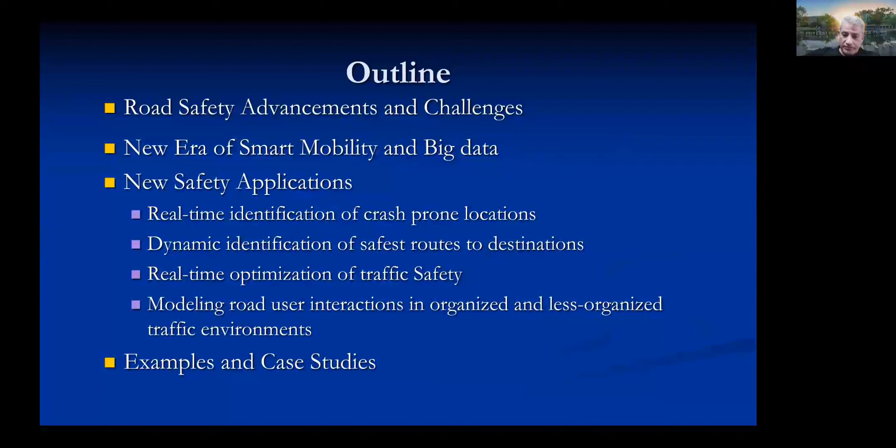So I'm sure you all know, and you don't want me to repeat that, it is very important to reduce the social and economic cost of collisions. The importance of reducing these costs cannot be overstated. We have 1.35 million people killed every year, and we are the only profession, transportation engineers, that have a product, and this product is the road network, that is associated with 1.35 million fatalities and 50 million injuries. And we have been getting away with it for the last 50, 60 years by blaming the road user.

There is some good news, especially in developed countries. Between 1970 and 2005, there has been significant reduction in road fatality rates, despite a considerable increase in traffic volume and vehicle use. So this is really good for developed countries. Although the picture has reversed and we don't have this reduction anymore.

However, associated with these advances are a group of challenges that will complicate the future direction of road safety if we don't change our approach to managing road safety. These challenges will make it difficult to achieve further advancements in reducing traffic fatalities and injuries. And in my opinion, these challenges are the reason for the smaller reduction and in many cases increase in road fatality rates in recent years.

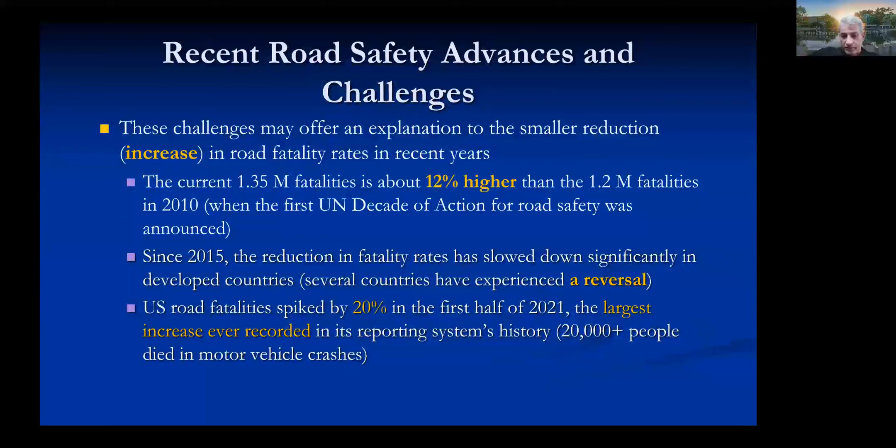So what are these challenges? Some of these you may know already. Reliance on collision data is reactive and has fundamental ethical and practical issues. A significant number of collisions need to be observed, which we will subsequently strive to prevent. So basically, stated bluntly, we need to have fatalities and injuries first to justify funding safety improvements to reduce future injuries and fatalities. So to spend money on improving safety, we need to identify locations as black spots, which means that these locations should have fatalities and injuries, which doesn't make a lot of sense.

The second one is the difficulty of evaluating the effectiveness of newly installed safety treatments within a reasonable time period. We're using 3-5 years of collision data. And because we cannot tell quickly how effective a new safety treatment is, practitioners are being discouraged from experimenting with innovative but untested safety treatments. We don't try new things because we will not know how safe or how effective they are. So there is a need to evaluate safety over shorter time periods, not 3 years, not 5 years, not even a month. We need to go for a much shorter time period.

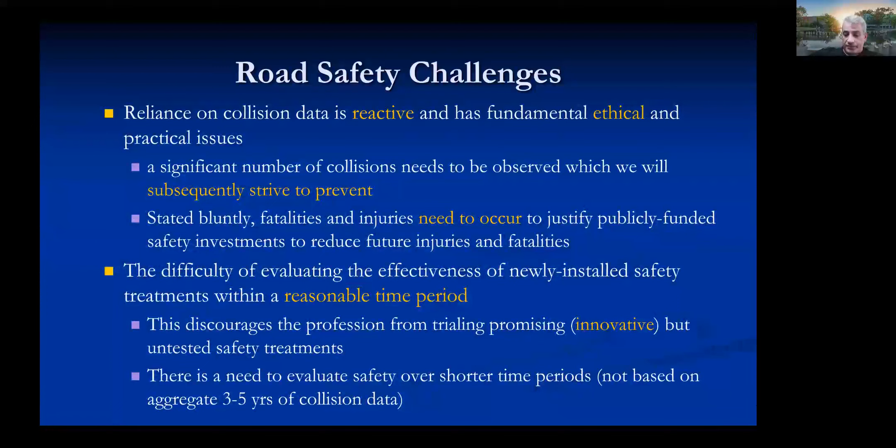So what is the good news, if there is any? Yes, there is, in my opinion, very good news. The good news is that we are on the cusp of a new era of smart mobility. And by smart mobility, we're talking about the application of information and communication technologies, which will lead to interconnected road infrastructure, travelers, and transportation modes, leading to higher safety, enhanced mobility, and minimum impact on the environment.

New technologies such as connected and autonomous vehicles are expected to provide considerable social and economic benefits. However, in my opinion, the biggest benefit will happen from big data. The expanding use of information and communication technology in transportation will allow the collection of huge, unprecedented volumes of data across all transport modes and systems.

So according to a new study from Morgan Stanley, for example, autonomous vehicles are expected to generate as much as 40 terabytes of data an hour from cameras, radar, and other sensors. And these can completely change the way we evaluate and manage safety, something we could not do in the past.

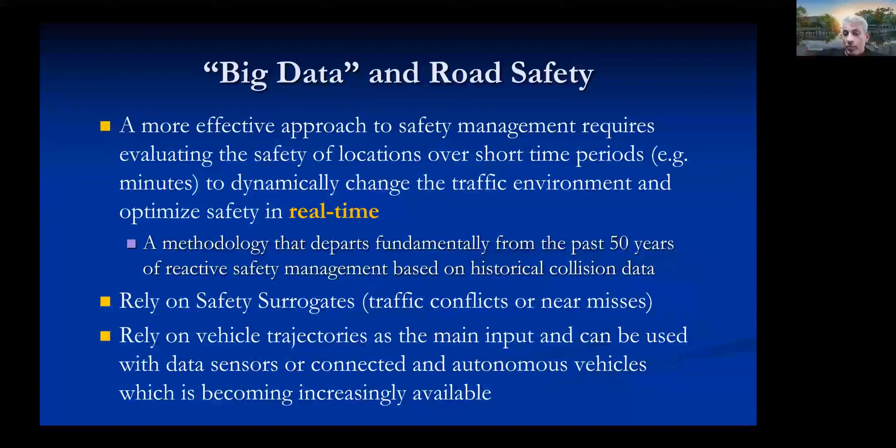And the main input to the new evaluation methodology will rely on road user trajectory. And it can be used with data sensors or connected and autonomous vehicles. It can come from cameras, from LiDAR, infrastructure-based LiDARs and cameras, or from the autonomous and connected vehicles as they move, which is becoming available. Much of the data is currently available and we can use it now, but we don't have the techniques that will allow us to mine and understand the data.

Another huge benefit, and this is my opinion again, is that this real-time safety evaluation will allow us to resolve the conflict between mobility and safety. Historically, road transportation has mainly involved the consideration of two main values, mobility and safety. In the past, these two values were always in conflict. To improve safety, you need to restrict mobility. Why? Because the higher the mobility, the higher the exposure to collision risk.

So most of the safety countermeasures were always targeting reduced exposure, no left turns, no right turns on red, and so on. In my opinion, again, the use of advanced technology and the availability of big data and the use of surrogate safety measures, not collisions, for real-time optimization of transportation networks can resolve this decades-old conflict between mobility and safety.

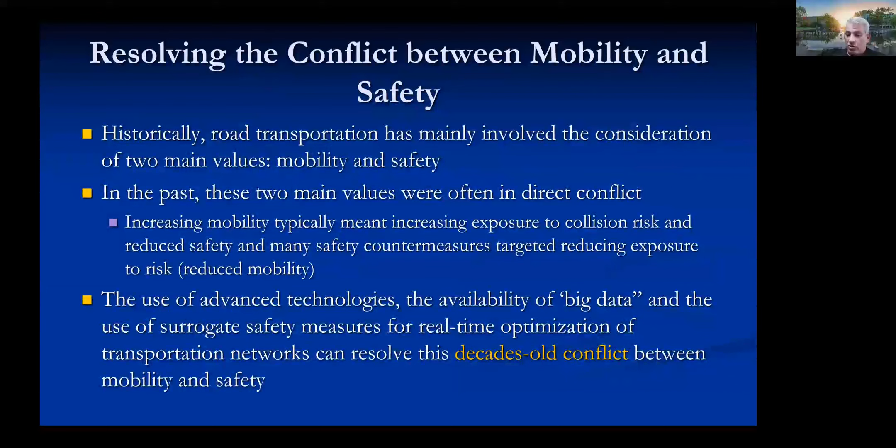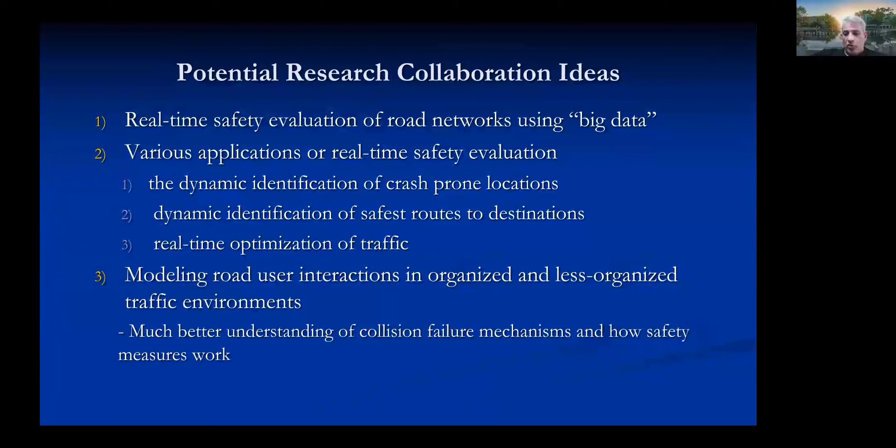So I'm going to share with you three main applications where I feel that this big data and this new era of smart mobility can make a big difference for safety. The first one is the real-time safety evaluation of road networks using big data. I'm going to show you different applications of real-time safety evaluation, the dynamic identification of crash-prone locations, dynamic identification of safest routes to destinations, real-time optimization of traffic, and how we are now modeling road user interactions in both organized and less organized traffic environments, which is giving us much better understanding of collision failure mechanisms and how safety measures actually work. So let's start with the first application, real-time safety evaluation.

What do we mean by real-time safety evaluation? Real-time safety evaluation will estimate the real-time crash risk from dynamic traffic data that are updated within a very short time interval. This was not possible 10 years ago. Now it is available because of recent advances in sensor technologies, such as edge cameras, LiDAR, and connected and autonomous vehicles. And these are resulting in large amounts of real-time traffic data, which we can use for real-time safety evaluation.

Real-time safety evaluation has been there for a long time, and researchers have done that for over 20 years. But in my opinion, most of the existing real-time safety models rely on historical collision data. So we're doing regression analysis again. We take collisions, and we have a binary logistic model, crash or no crash. So these rely on collision data again, which is problematic, as I said from the beginning.

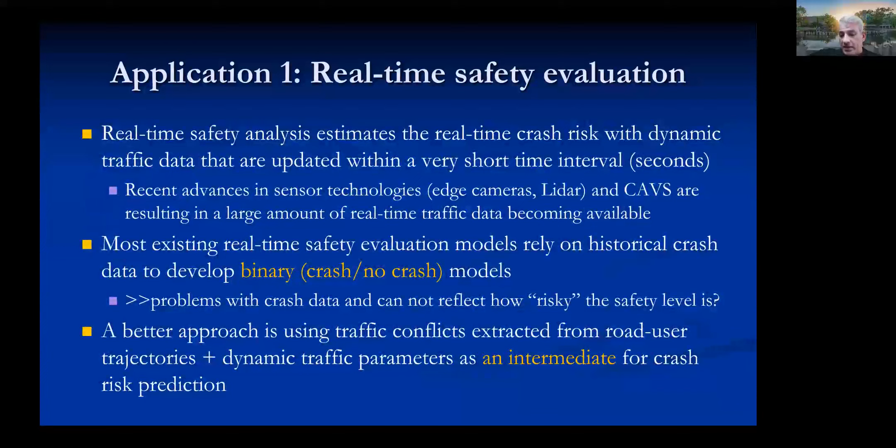Not only that, these existing models, and there is a lot of work in Florida and actually in China, many researchers are using these crash-based real-time safety evaluation models, and they don't reflect how risky the safety level is. A better approach, in my opinion, is using traffic conflicts extracted from real-time road user trajectories, plus dynamic traffic parameters, as an intermediate for crash risk prediction. Let me show you an example of some of the work we've done with autonomous vehicle data from Lyft.

So this is a case study from a corridor in Palo Alto, California, using 3 months of autonomous vehicle data. The corridor had 9 signalized intersections, as you can see, and there is an autonomous vehicle going through the corridor back and forth.

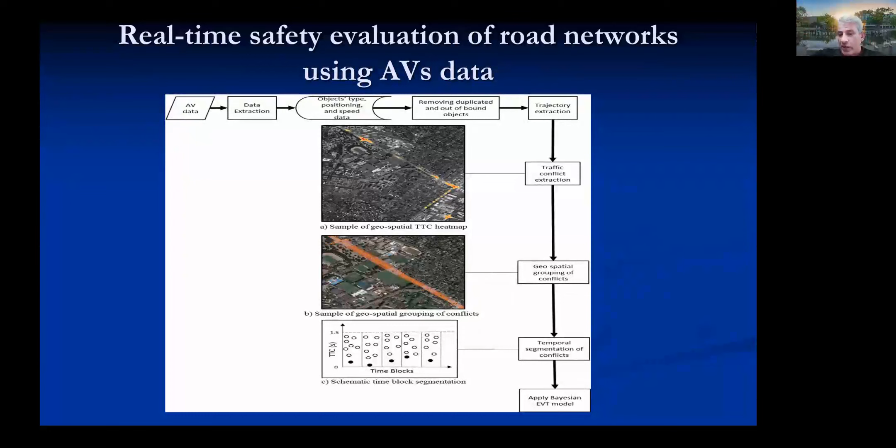So we take this data generated by the autonomous vehicle and extract all the vehicle trajectories, not only for the autonomous vehicles, but the surrounding vehicles as well. And from these trajectories, we extract traffic conflicts. We do geospatial grouping of conflicts, and we can also do temporal segmentation of conflicts, and then we can model that to get the real-time crash risk. So that's the corridor, and you can see the conflicts changing in real time.

And then what we can do is take these conflicts, and there are several techniques that we can use, all based on extreme value theory. I really like this approach, because it offers a realistic way of going from trajectories and conflicts to crash risk without using regression and modeling a crash, no crash, based on historical information.

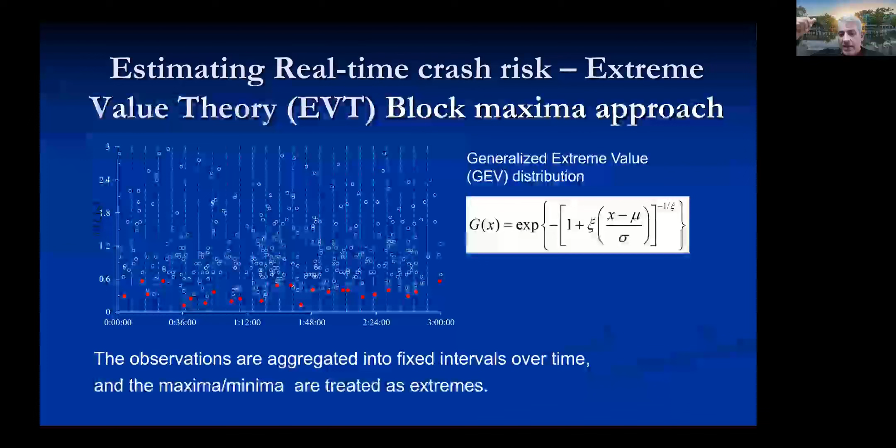So in this case, you see that these are all the conflicts, and we're using one conflict indicator in this case, which is the time to collision. We take the extremes, and this approach is called the block maxima approach. So these red dots are the maxima or the extreme conflicts within each time interval. We fit an EVT model in this case, and we can use that to extract crash risk from conflicts.

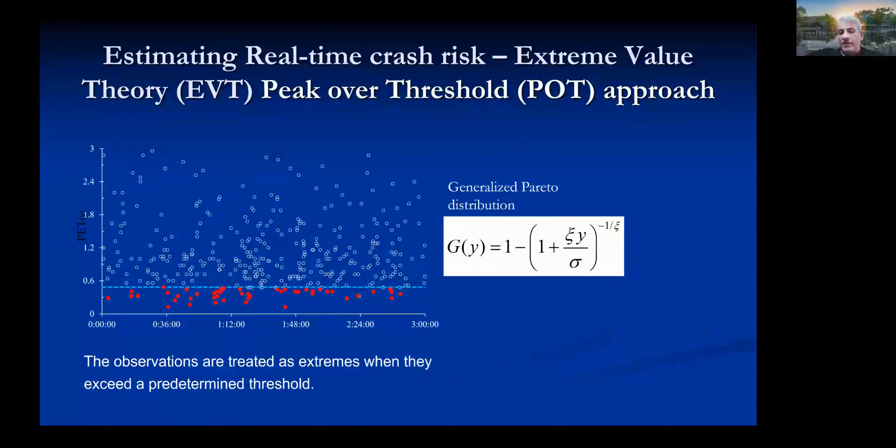Another approach is what we call the peak over threshold approach. And again, this threshold can vary, and it can be a function of many covariates. And in this case, we will have a generalized Pareto distribution. And again, we can use that for real-time safety evaluation of corridors and locations.

So in this case, we have 4 locations in Surrey, British Columbia. And for each location, 4 figures, 1 location each, you see different conflict indicators: MTTC, modified time to collision, PET, post-encroachment time, DRAC, deceleration rate to avoid a crash, and so on. And for each one, the green horizontal line is the observed number of collisions, and the red dot is what we are estimating from this aggregate crash rate over a year. And you can see that the model works extremely well. So we can go from vehicle trajectories and conflicts to actual crash risk.

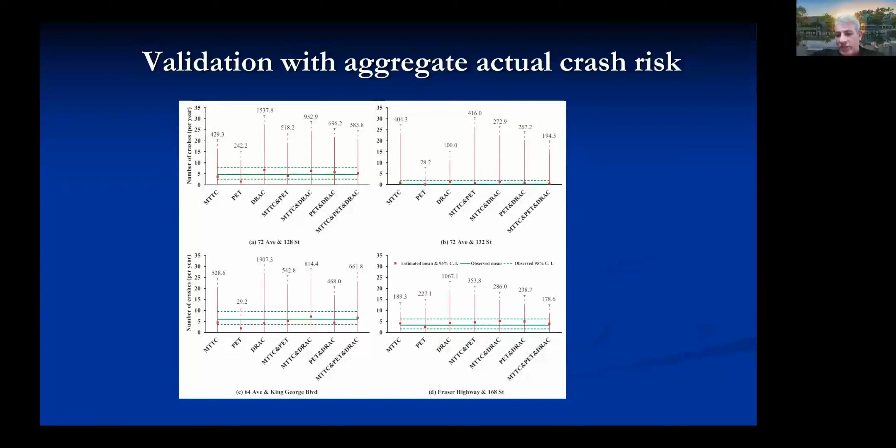But the beauty, what I really like about this approach, is that we can do real-time safety evaluation. So in this case, we defined 2 real-time indicators from the EVT distribution. One is called crash risk, which is only positive when there is a risk of a crash. The other one, which in my opinion is more useful, is the return level, which fluctuates. So it offers a value that can reflect how risky a situation is.

So in this case, you can see we're using different indicators, the time to collision, the post-encroachment time, DRAC, and for each indicator, there are 2 real-time metrics. One is the crash risk, one is the return level. And you can see that for these 4 intersections, it varies in time, and we can use that to evaluate the real-time safety of a location.

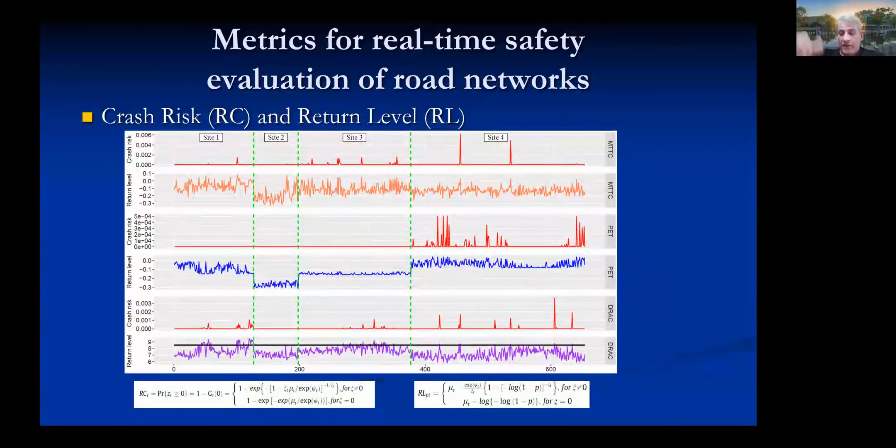So this is going back to the corridor in California. You can see that we can evaluate the safety of the corridor, intersections, and segments. And you can see how we can change these in time, and we get very good evaluation of the safety level.

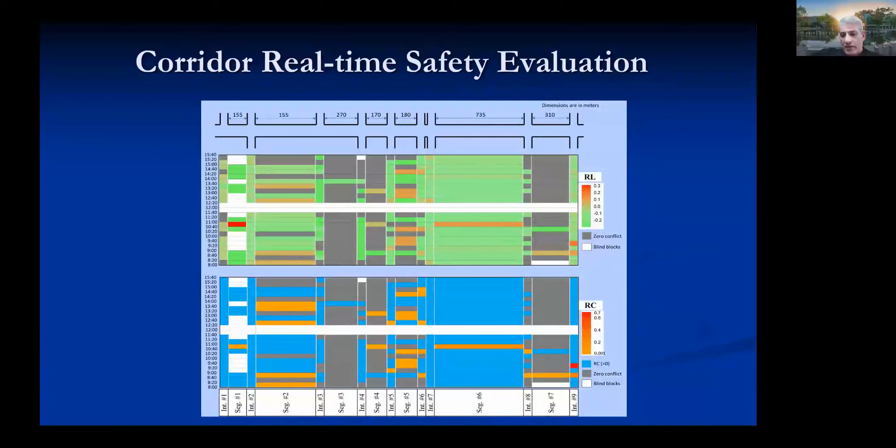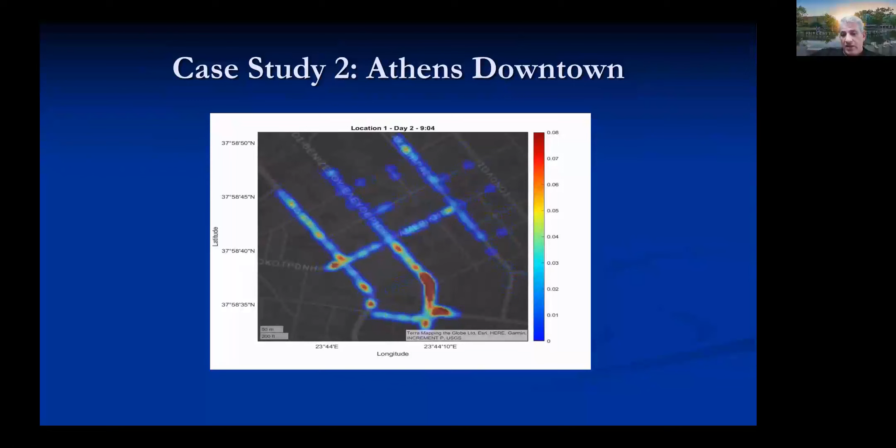So what is collision prone at time 1 is different than what's collision prone at time 2, time 3, and time 4. And we can change that by making changes to traffic control, mainly, to minimize the adverse safety impact of traffic operation.

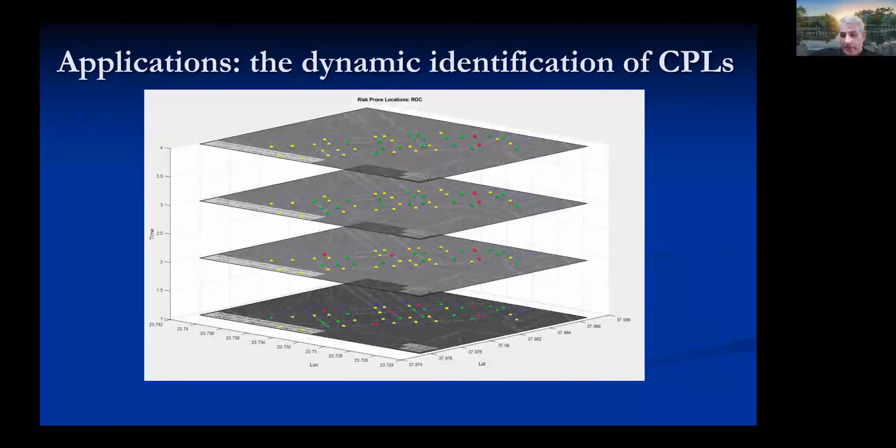And I can also aggregate this information. I don't have to only apply traffic control safety improvements. I can aggregate this information and end up adding a left turn lane or adding a right turn lane. So I can still go for the high-level countermeasures in addition to making dynamic traffic control changes.

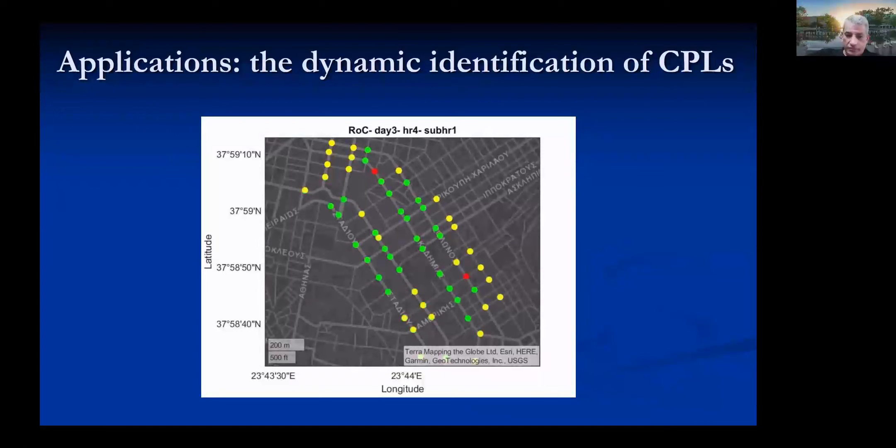So how would you improve the safety of these dynamic crash-prone locations? In general, safety improvements at the identified crash-prone locations can be undertaken by making changes to traffic control, phase changes, variable speed limits, ramp metering, etc. Or it can also be done at the network level. In this case, it will be signal offsets, rerouting, which in my opinion carries a lot of potential.

And this real-time safety optimization can lead to significant safety benefits that cannot be achieved through the traditional current reactive safety management approach. Let me give you an example of some of the work we've done on taking signalized intersections and optimizing the operation of the signal for safety.

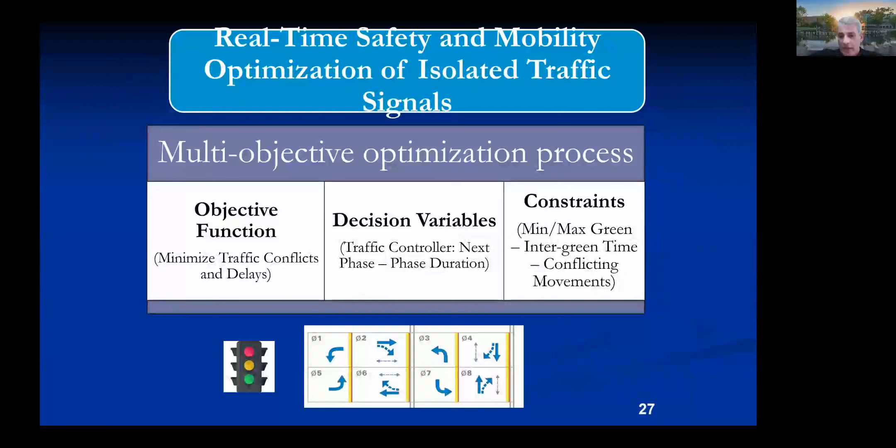So these adaptive traffic signal controllers have existed for a long time to minimize vehicle delay. But very few efforts, if any, were undertaken to optimize safety in real time. And if you remember, for the first time, we have something like this.

So if you look at the bottom figure, the joint return level, we have a safety level that fluctuates in time. And I can use that in the optimization process to minimize this safety level, this crash risk. And by doing so, I will minimize the number of crashes that will occur at the signal.

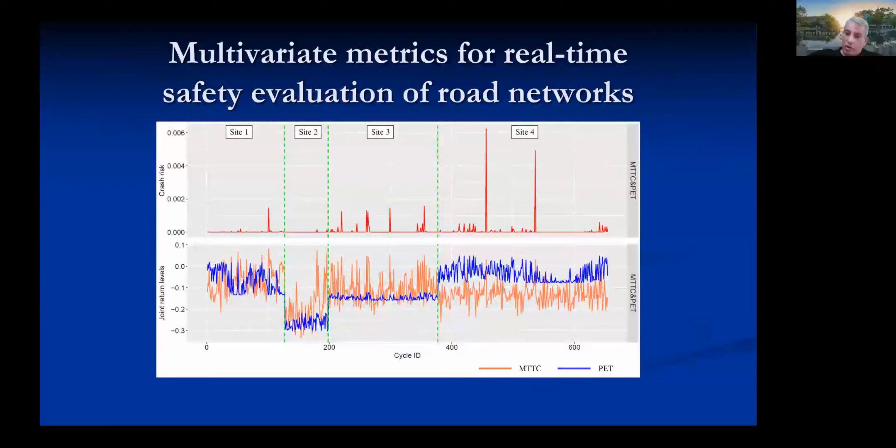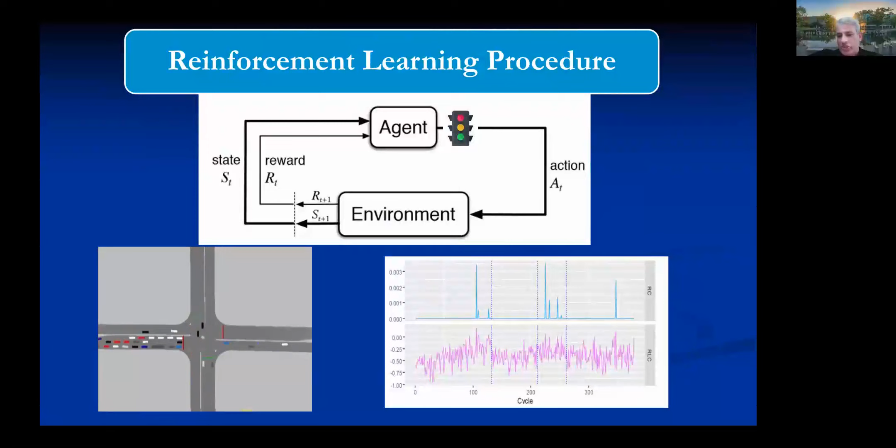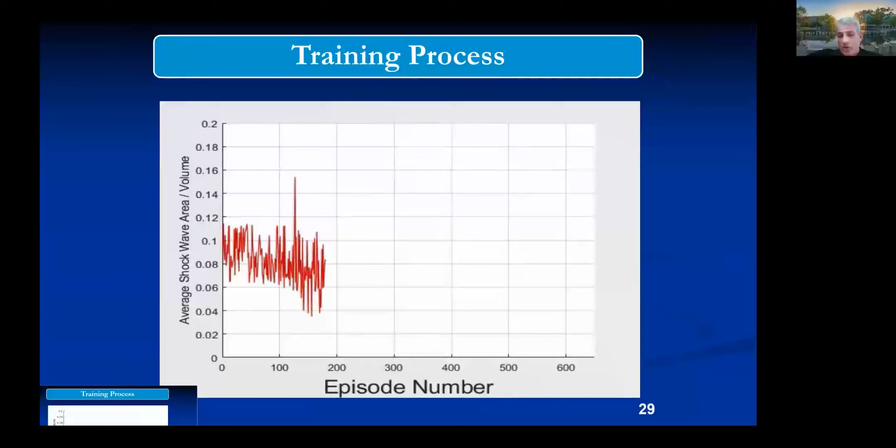So again, you can see that we use both, but I prefer to use the RLC, which is the return level on a cycle, because it is a continuously changing safety level that I can use for minimizing crash risk and conflicts. And I can train the controller using AI techniques. In this case, we are using a technique called reinforcement learning.

And you can see in this case how the shockwave area at the approach to the intersection is changing as the algorithm is learning how to minimize safety risk. So I think at episode 530 or something, you can see that the controller has already learned how to minimize crash risk and how to minimize average shockwave area.

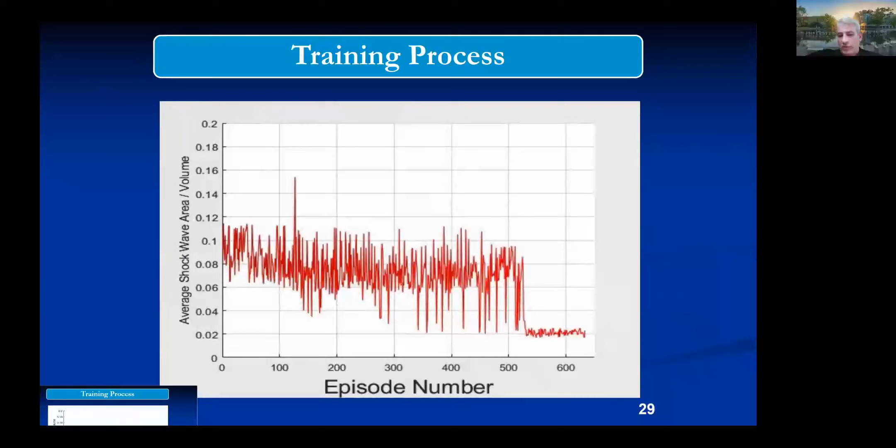Was that a question?

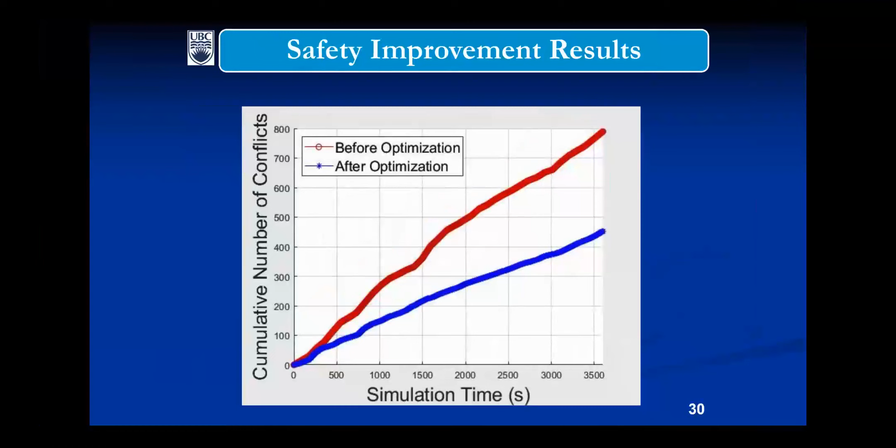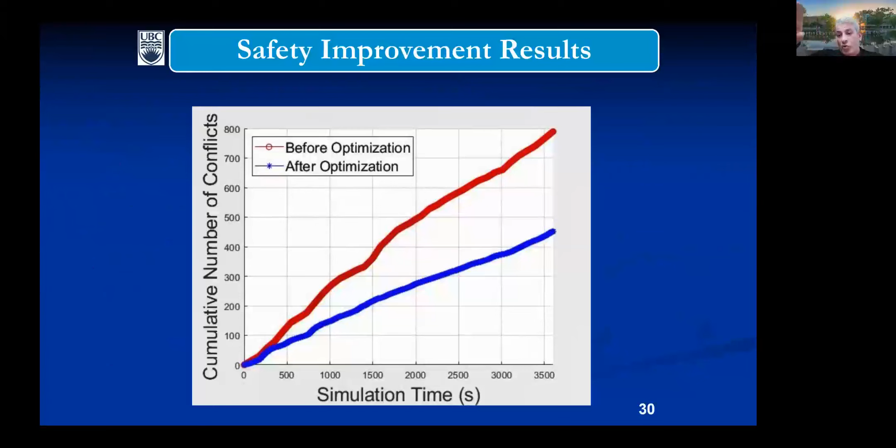Another work that we're doing that I really think would be very important is what we call the signal vehicle coupled control. In the one that I just showed you, we are optimizing the traffic controller operation. But we can also adjust vehicle speeds and vehicle trajectories to minimize crash risk. So I can have a coupled control.

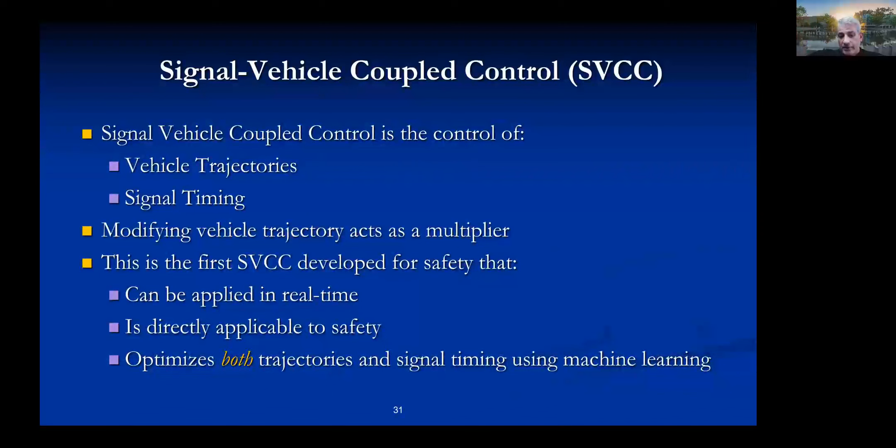So in this case, we use what we call soft actor-critic RL algorithm, reinforcement learning algorithm. The inputs are estimated conflicts on each approach using a model, and also the time and phase and the vehicle coordinates. We are assuming that we know the coordinates from connected or autonomous vehicles, or even from cameras, edge cameras. The reward function that we're trying to minimize is the sum of traffic conflicts on all approaches.

So this approach will issue speed advisories to vehicles within a range on each approach and uses connected vehicle data to identify key variables. This was applied to two intersections. As you see, both are in Surrey, British Columbia. And we tested different scenarios.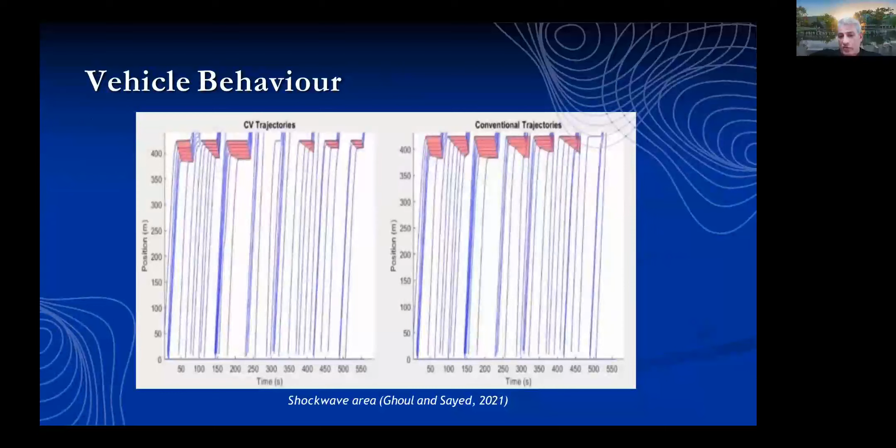And you can see that on the right are the traditional vehicle trajectories at the intersections. And on the left, you can see how adjusting vehicle trajectories and providing speed advisories has resulted in significant reduction in shock waves in this case. So we can really improve safety by doing both traffic control optimization and vehicle trajectory optimization.

And you can see here that we are achieving about 40 to 50, in some cases 60% reduction in traffic conflicts. And what we found is that at high volume intersections, the signal optimization is more important. While at low volume intersections, the trajectory optimization will be more important because of the low volume. I want to make sure that we do not develop shock waves and a lot of conflicts between different vehicles.

We don't have to optimize safety alone. We can optimize safety and mobility at the same time. So in this case, I'm showing you that we can have a multi-objective optimization of safety and mobility by applying a weight. And this weight, let's say that the weight goes from 0 to 1 for safety, and it will be 1 to 0 for mobility.

And you can see that depending on the weight, if you go 100% safety, which is the right of the figure, you can see that the conflict will be reduced significantly, but not the delay that much, and the other way around. So we can apply a weight to mobility and safety in one multi-objective optimization of the signal control.

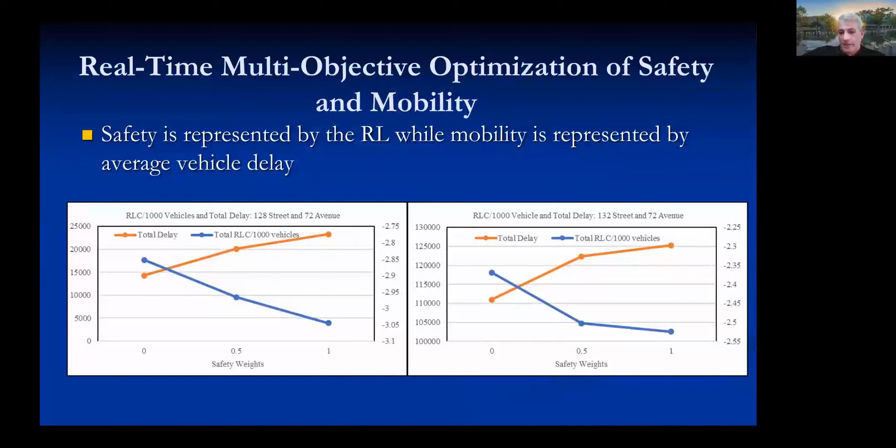The third application I would like to share with you is multi-agent modeling of road user interaction. And as I said, I remind you, all of these applications are only possible through big data that did not exist before. A lot of people have been simulating traffic safety using programs such as SSAM. Some of you may be familiar with SSAM. That actually was mainly developed at UBC long time ago.

And the problem is that it never worked, and you can still see papers today using this SSAM model with VISSIM, for example, to estimate conflicts. And they claim a reduction in conflict and that something really works. The problem is that SSAM doesn't work, even though we developed that.

And for two main reasons: VISSIM parameters, micro-simulation model parameters such as VISSIM, they are not calibrated for safety. They are never. And there have been methods, including Professor Yanyong here, that worked on calibrating the road user behavior parameters for safety. So we will take actual conflicts and we will take simulated conflicts and try to minimize the difference by adjusting road user behavior parameters.

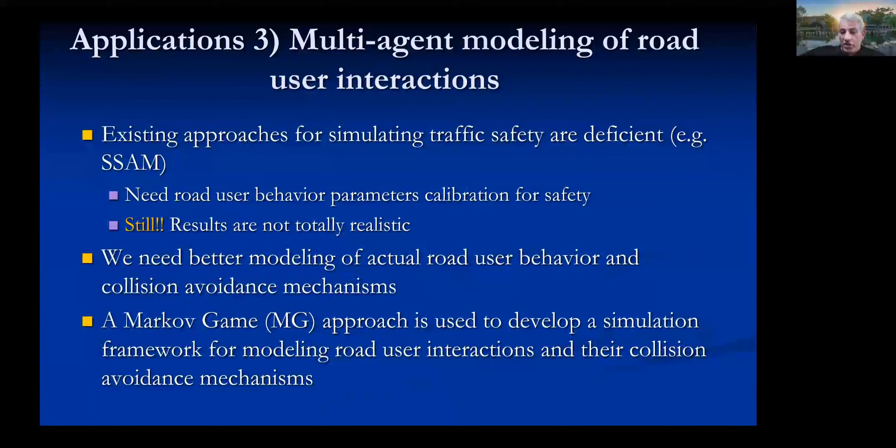So our recent work is using Markov game approach to develop a simulation framework for modeling road user interactions and their collision avoidance mechanism. And I will show you some examples. This is an intersection from Shanghai, and you can see how these pedestrians will run when the vehicle is doing a right turn. So this is an interaction.

Can we use AI to duplicate the behavior of the two road users in this particular interaction? Would a simulated pedestrian run, or would the vehicle stop? What will happen if I try to duplicate this behavior?

This is an example from the same intersection, and you see the motorcyclist that is swerving around other objects. Can we model that and duplicate this exact behavior in the near miss? Yes or no? And the simple answer is yes, we can. So in this case, we use multi-agent modeling of road user interactions. We use a utility-based micro-simulation model.

So road users in this case are modeled using multi-agent reinforcement learning as rational decision makers that attempt to maximize their utilities over time. So we have a utility function that will be maximized. The utility is represented by a reward function, and this reward function is extracted or recovered from actual examples of near misses. So we feed the program with many near misses or many interactions, detailed interactions, and the AI approach, this approach, the adversarial inverse reinforcement learning approach, will learn and can duplicate the behavior.

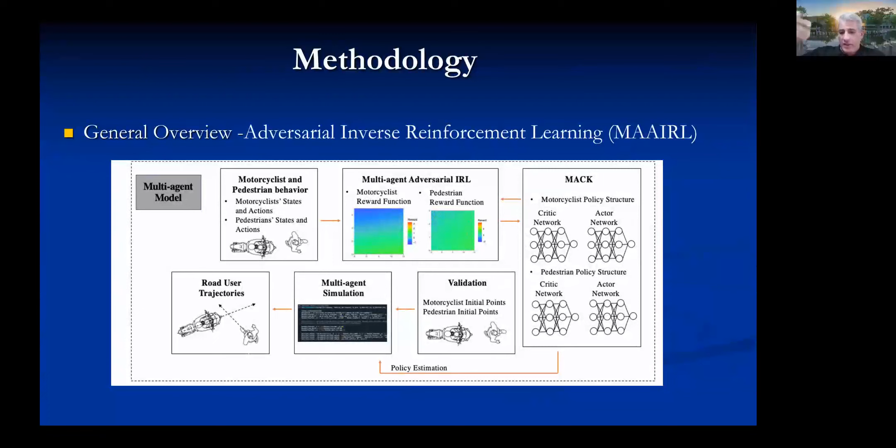And we go through this approach. I don't think we have the time to describe how the approach works. But anyway, it is an adversarial inverse reinforcement learning approach, where we have two networks, a critic network and an actor network, and we try to recover to the extent that we cannot differentiate between the two.

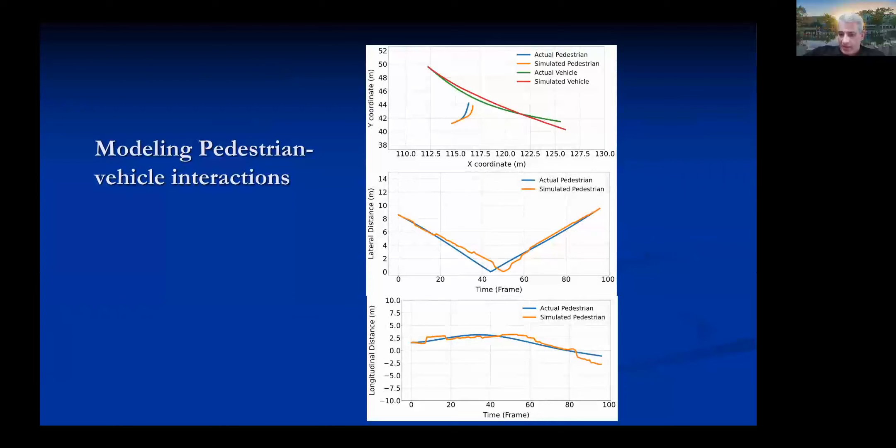So this is an example of simulated and actual trajectories. And you can see that we can duplicate the trajectories with very high accuracy. And this is really good. So when we simulate safety in the future, we simulate it based on realistic actual road user behavior.

Not only that, so in this case, I'm showing you a group of near misses that we use to test the simulation model we have. In this case, I'm trying to see whether the simulation model will take exactly the same evasive actions or not. So in the top, we have two models. One is single agent, one multi-agent to the right. So let's focus on the three columns to the right, which is the multi-agent, more advanced approach.

So in this case, you have the actual trajectories and you have the simulated trajectories. And the three actions are acceleration, deceleration, or no change. And you can see that if you look at the diagonal, it's very high. So we have about 82% accuracy in predicting the right evasive action, whether it is acceleration, deceleration, or no change. Same thing for swerving. We can duplicate the same behavior with very high accuracy.

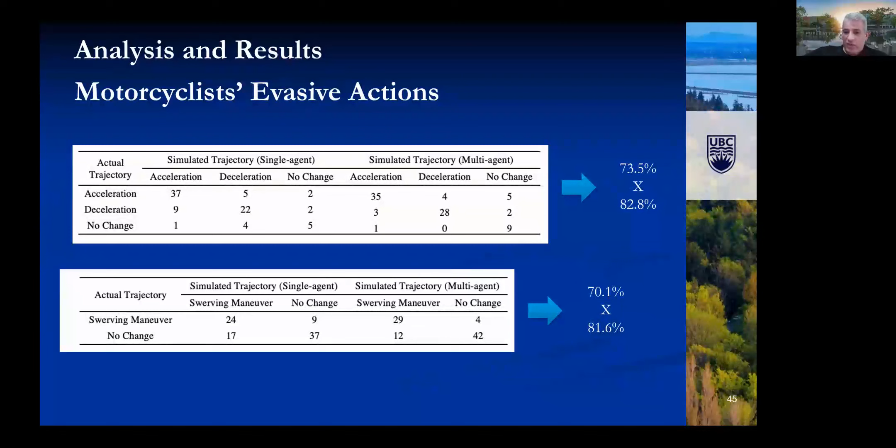And of course, multi-agent models are much better than single-agent models because they are more realistic. They deal with two interacting road users, not assuming that one of them is constant. But this is also very interesting, and I think you will find that interesting. We can even estimate or predict a conflict indicator. In this case, we are trying to predict the post-encroachment time. So we are modeling exactly the same near misses and comparing the actual PET value to the simulated PET value. And you can see that we're getting a correlation coefficient of 0.85, which is extremely high.

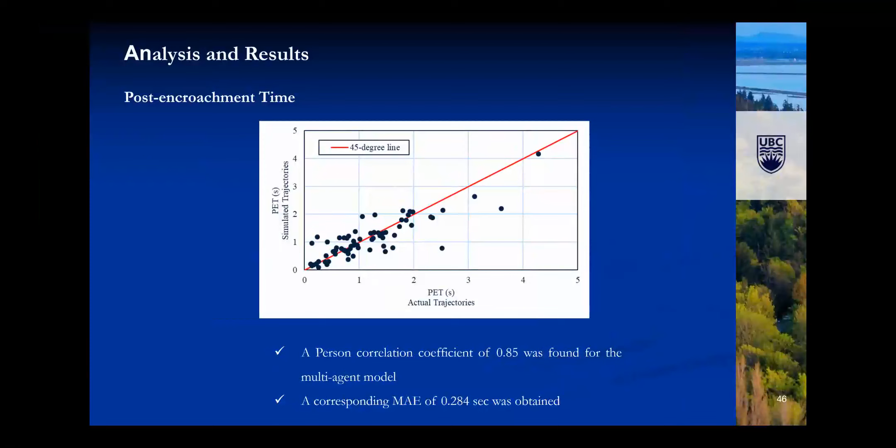So now we have the ability to duplicate the actual behavior of road users, and we can even change one road user, replace a vehicle with an autonomous vehicle, and see how the safety will improve and what are the issues. We can get much better understanding of all the safety issues.

So in summary, I think I already used 40 minutes. Despite the recent success, the future of road safety is uncertain and faces many challenges. And this is manifested in the reversal, or the increase in fatality rates and injuries since 2005, which is accelerating. The good news is surface transportation seems to be on the cusp of a new era of smart mobility that can offer considerable safety benefits. And this is the good news.

There are considerable opportunities in new technologies, connected and autonomous vehicles, advanced sensing, and edge computing. Actually, edge computing, in my opinion, is one of the most important things that will make a lot of change, because we don't have to process data and send it to the cloud. We can process data on site, which will save us a lot of time to become more real time.

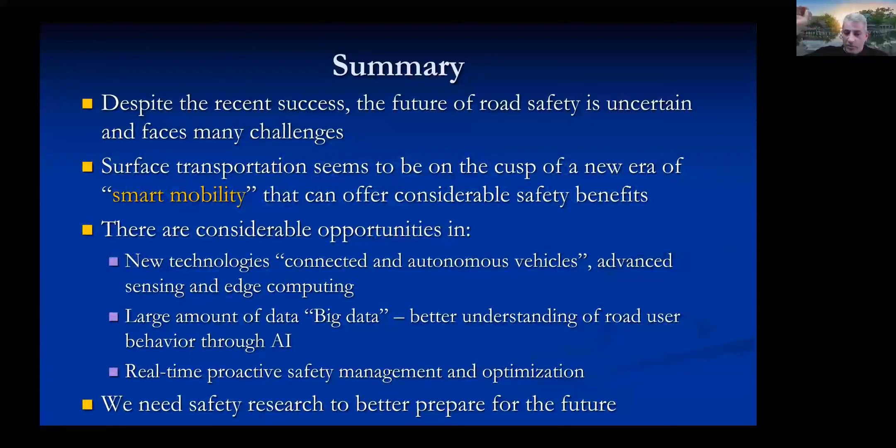We are collecting large amounts of data, what we call big data, which will lead to better understanding of road user behavior through advanced AI techniques. We are doing real-time proactive safety management and optimization, which is a total departure from what we used to do for 50, 60 years. And at the end, I would like to emphasize the importance of safety research to prepare us for the future.